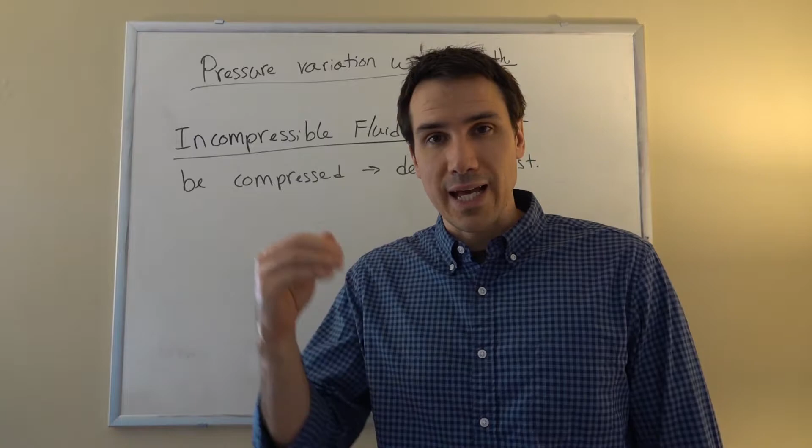Now we're going to talk about the pressure variation of a fluid as you go down into the fluid. So imagine diving into a lake. The deeper and deeper you go into the lake, the higher the pressure is.

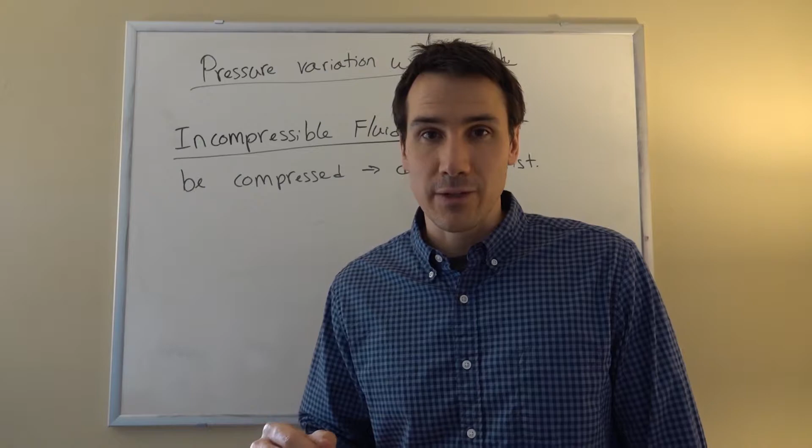And the first thing that we need to think about when we want to do this is we need to limit ourselves to what's called incompressible fluids. This basically allows us to simplify the math. And what an incompressible fluid is, it means that the fluid cannot be compressed. So water is effectively an incompressible fluid.

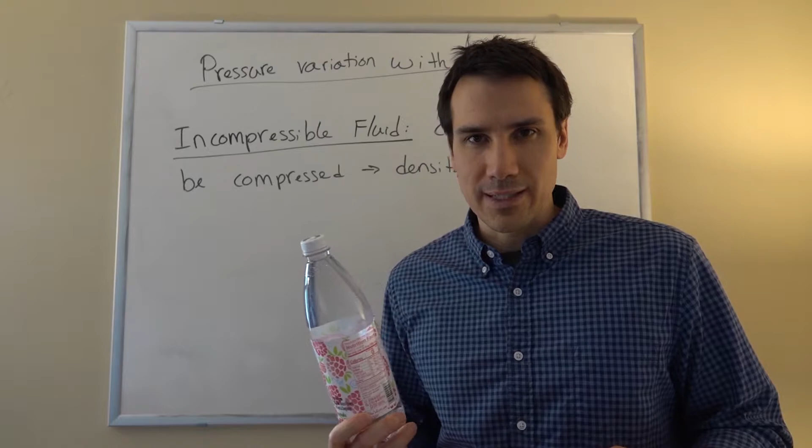Like all things in physics, this is not true 100%. It's not that there is a 0% ability to compress water, but it's very, very difficult to compress water, and it is effectively an incompressible fluid. For any situation that you will find on Earth, water is an incompressible fluid, right?

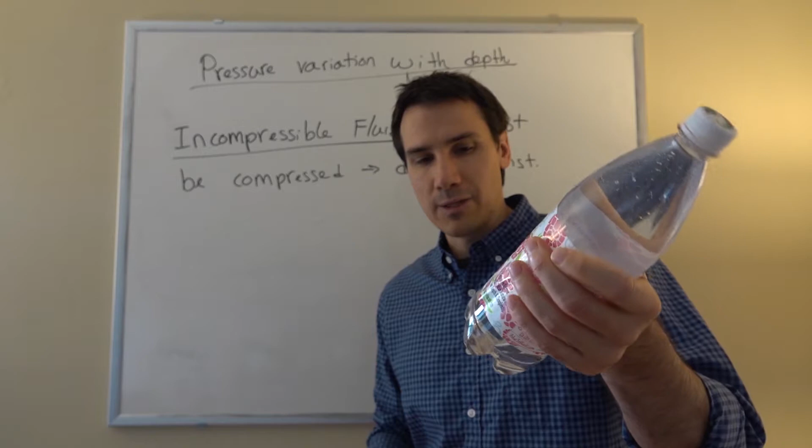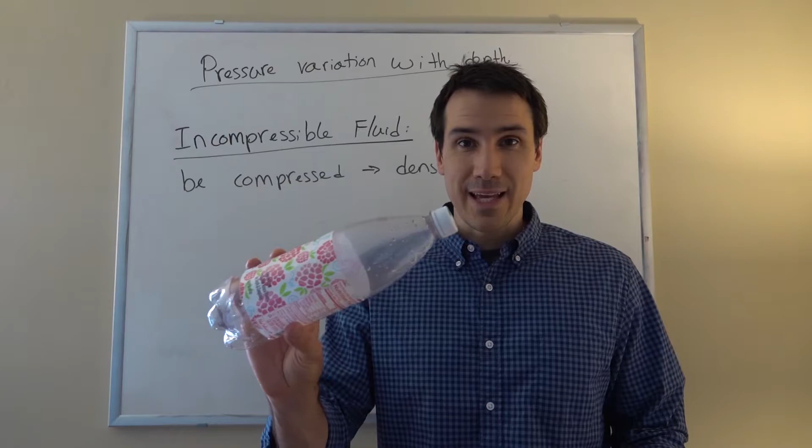So here you can test this just by filling a bottle with water completely to the brim. Notice that there's almost no air. There's a little bit of air trapped in my bottle, but there's almost no air. And if I try to squeeze this bottle, it's very difficult to squeeze. Same experiment with a bottle filled with just air, and I can clearly compress the bottle significantly.

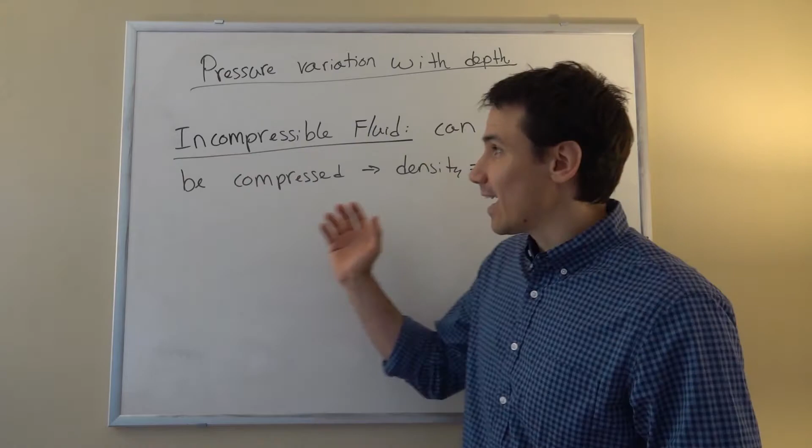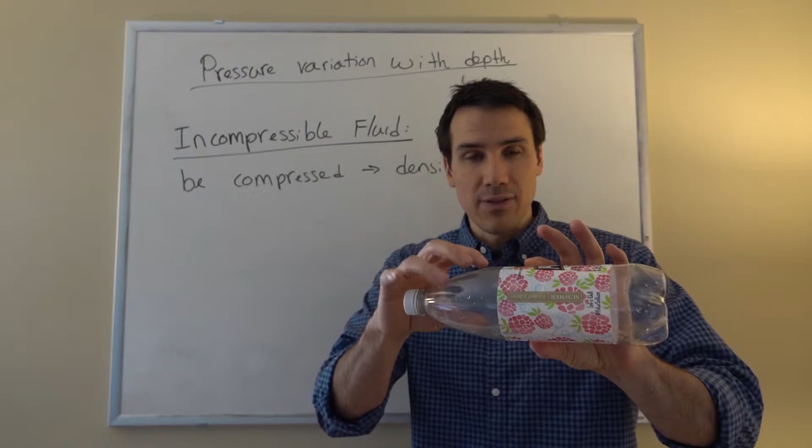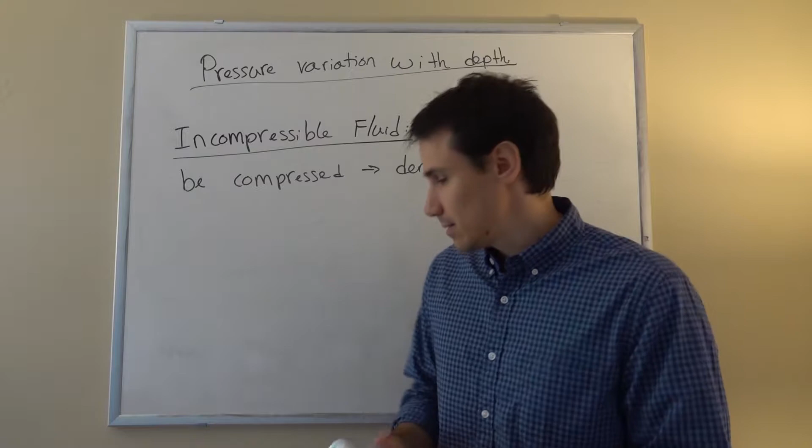So air is not an incompressible fluid. It is clearly compressible, and I can change the density of the air, right? There is some amount of mass of air in this bottle, and by squeezing it, I am able to reduce its volume, which means that its density increases, right? Because I have density equals mass per volume.

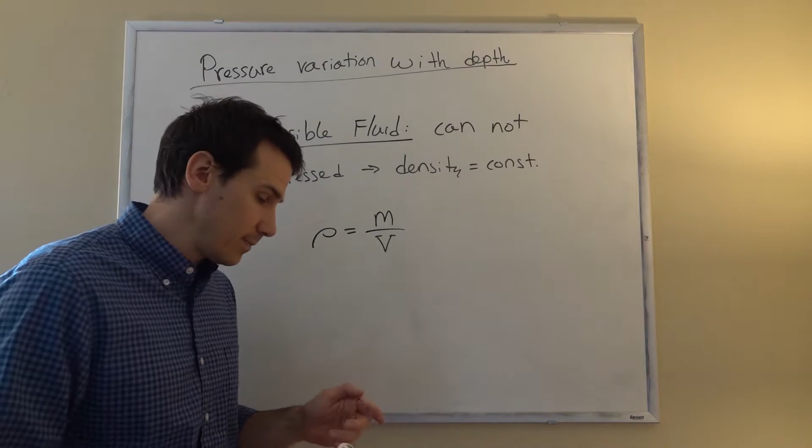So when I squeeze the bottle, I reduce the volume and I increase the density. I also, by the way, increase the pressure. So there is more pressure when I squeeze the bottle than when the bottle is unsqueezed. So if we want to think about how the pressure changes as we move down in some fluid, we can think about the forces on a block of that fluid.

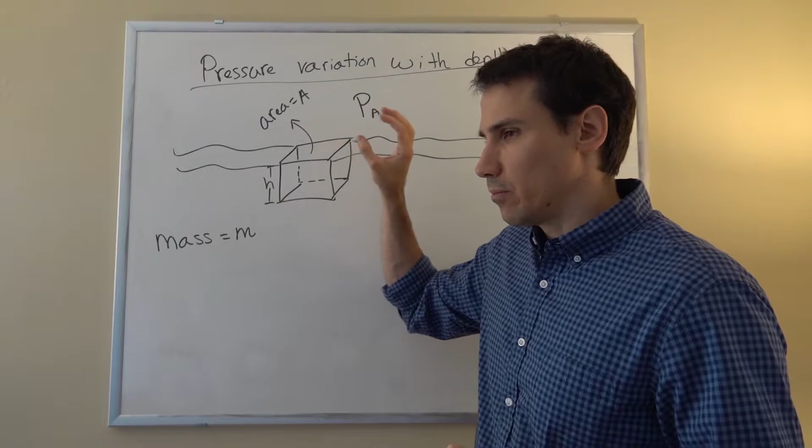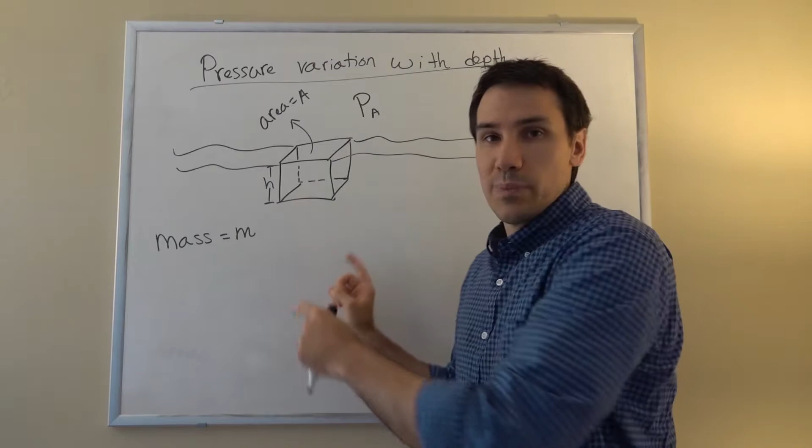So here what I have is just a box of water sitting in a lake. There's no physical box around the water. It is just that I am considering just this bit of the water inside of my imaginary box, right? So you can imagine just taking a still lake and then deciding to only pay attention to one box of the water in the middle of that lake.

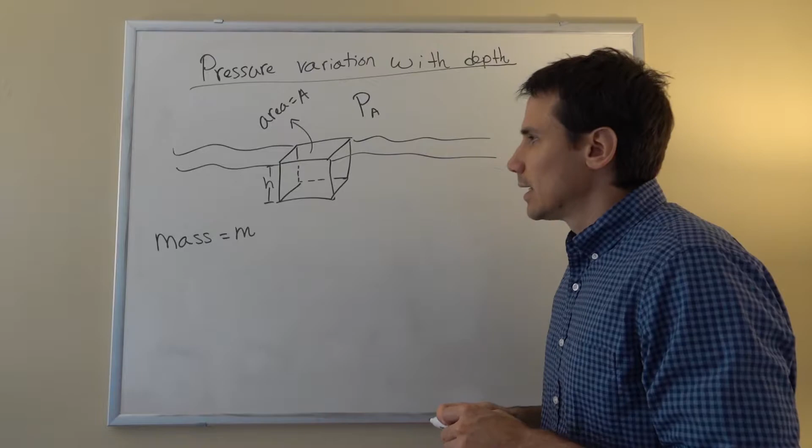I am giving my box of water some mass M. I am giving the top of my box some area A, and I'm giving my box some depth, which I'll call H. Now, if we want to think about the pressures on this box, the best way to do it is to just use our Newton's second law forces equation here.

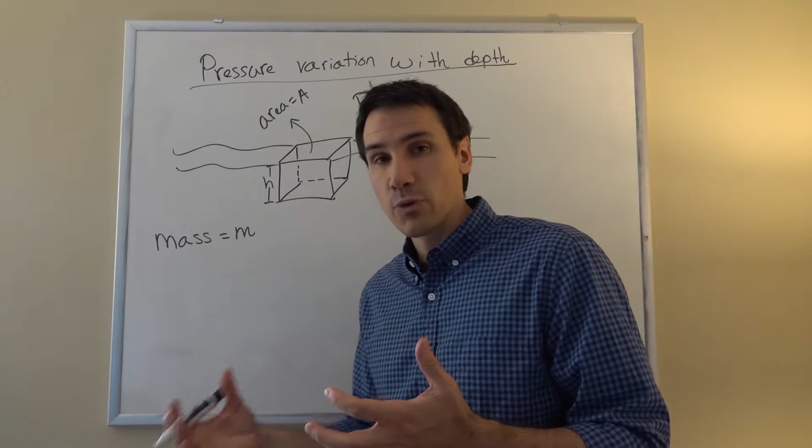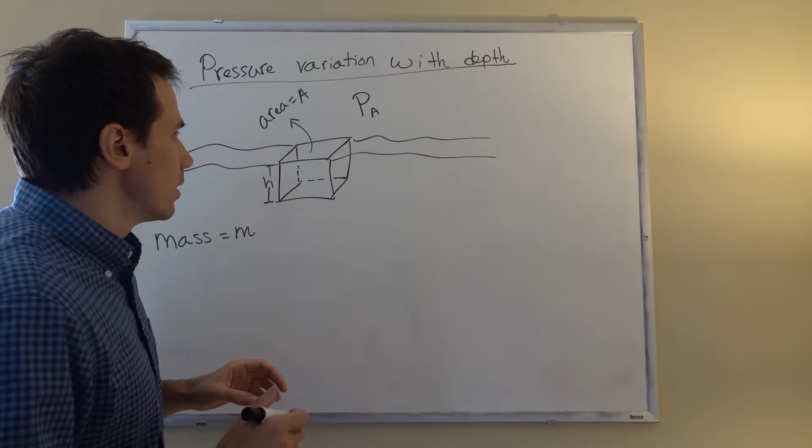So let's think about all of the forces on this box. Well, first, let's just take care of X and Y. The X direction here. So I know that the box is not accelerating back and forth, right? It is just sitting there, which means that the total force in the X direction must be 0. The total force in the X direction must be 0 because I'm not accelerating in X.

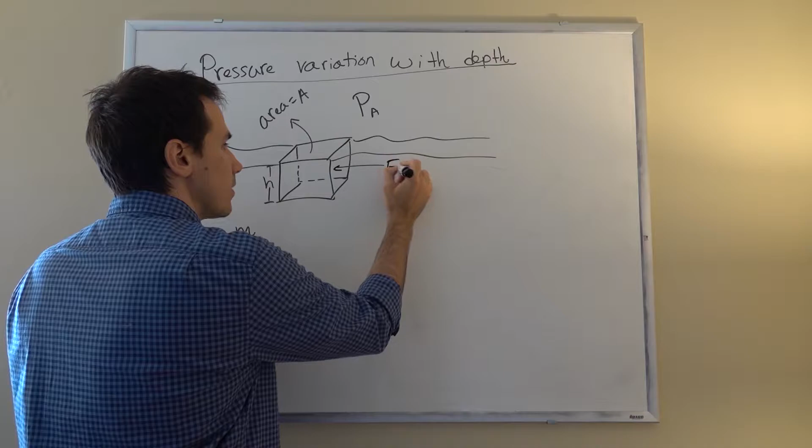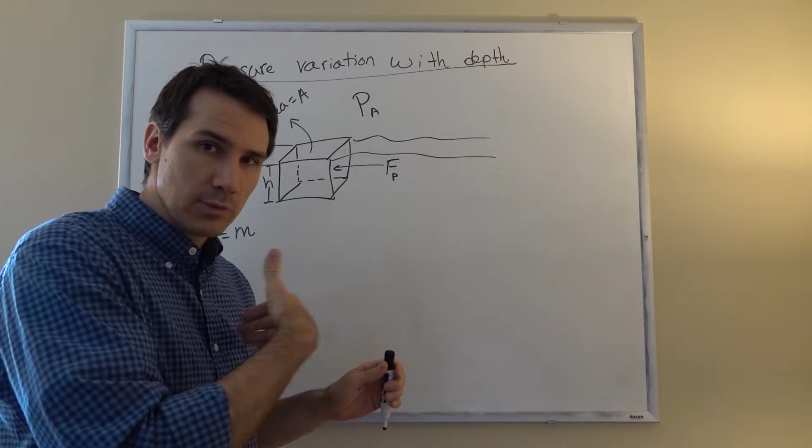The only forces that are on my box in the X direction, so I'll just consider left and right here, is some force of pressure from the right, right? Just like on your body, the pressure force pushes inward on you, right? The air is pushing inward on you. The pressure force on this object pushes inward on it.

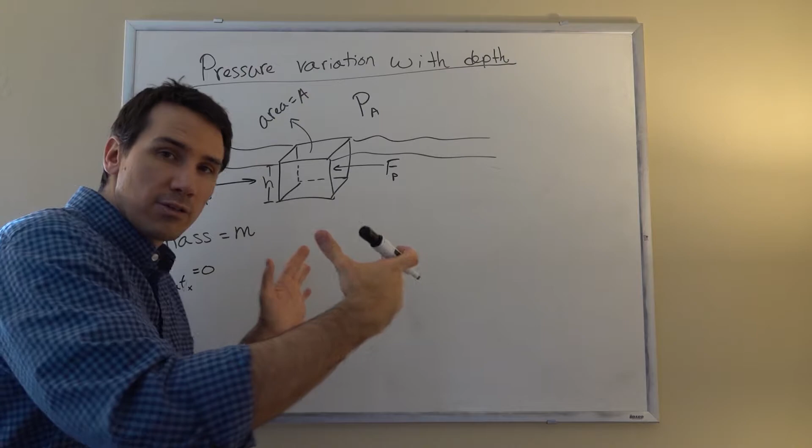We also have another force of pressure pushing the other way toward the right, so our box of fluid is getting squeezed. But because it's not accelerating in X, these two forces must, of course, be equal and opposite. So the pressure on the left side is the same as the pressure on the right side because my object is not moving.

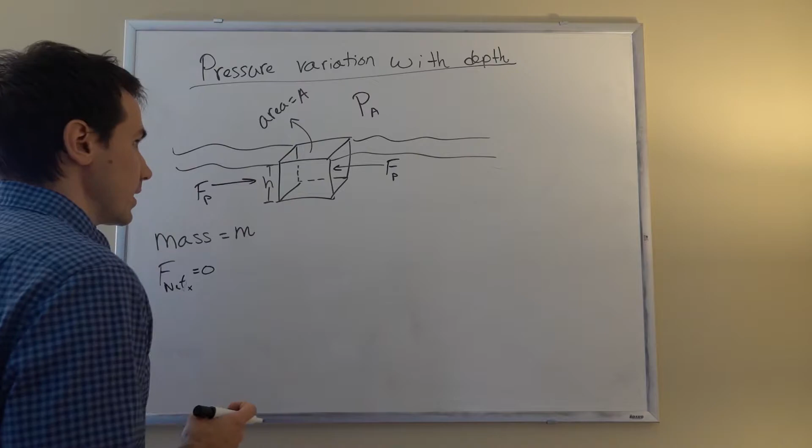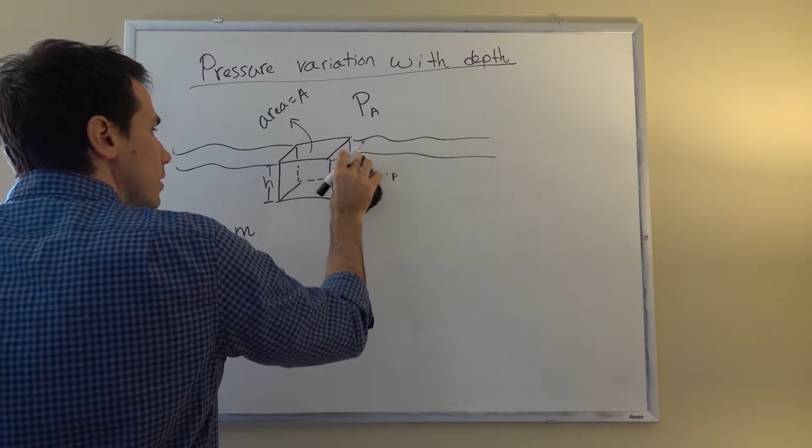Okay, so the next thing that we can consider is the forces in the Y direction, which are more interesting. So I'm going to erase my X forces just to be a little cleaner here. I know that the box is also not moving in the y direction. So my net y force must also be 0, right? Because it's not moving down and it's not moving up, it must have 0 net y forces.

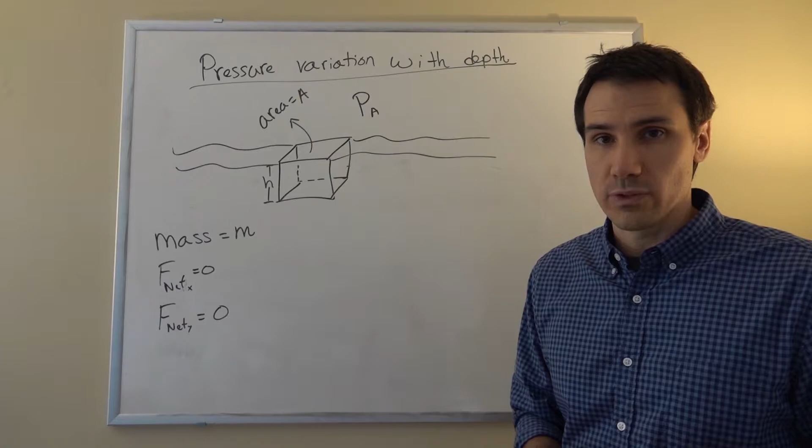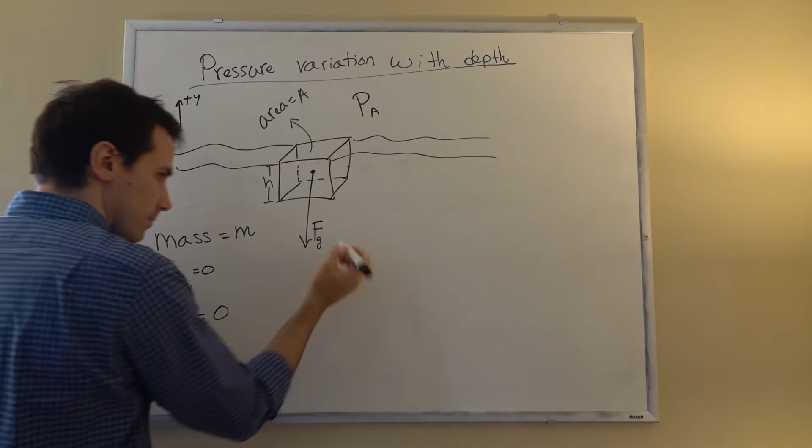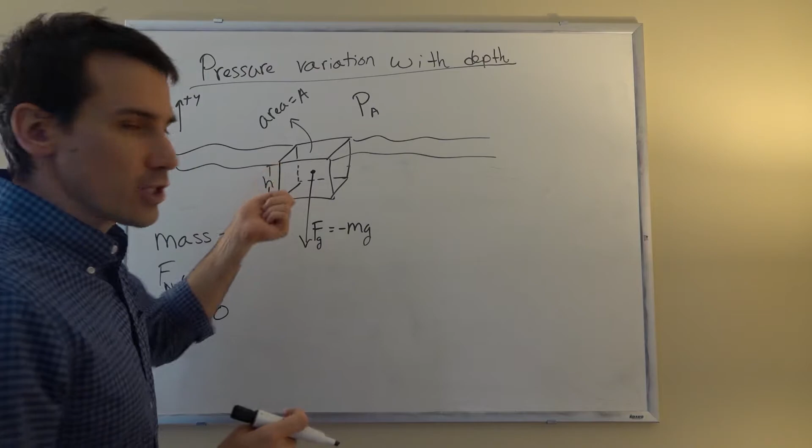So let's see if we can draw all of those forces. Well, first I know that there's gravity on the box, so there must be a force of gravity, and I'll choose up to be positive. A force of gravity equal to negative mg. We draw it as acting on the center of mass, but of course it is each individual water molecule being pulled down. So there is a force of gravity acting on this water as a whole, pulling it down.

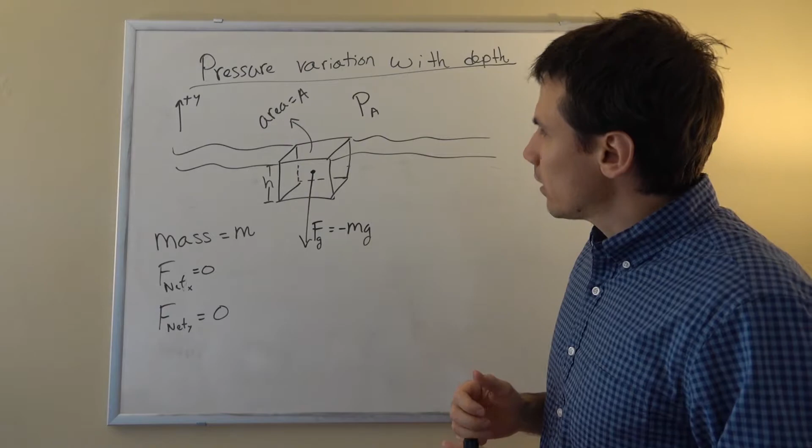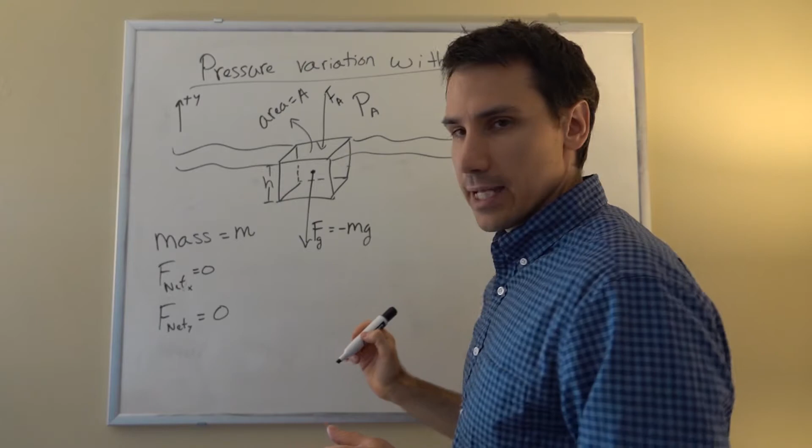We also know that there's a pressure due to the atmosphere, which is also pushing down, right? So the atmospheric pressure must be pushing down on the water. So I can draw that force. I'll write it as F sub A. And the force of the atmosphere must be equal to the atmospheric pressure multiplied by the area, right?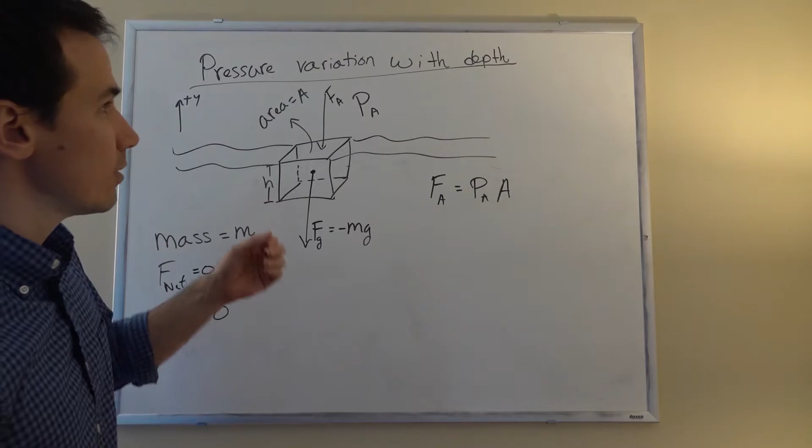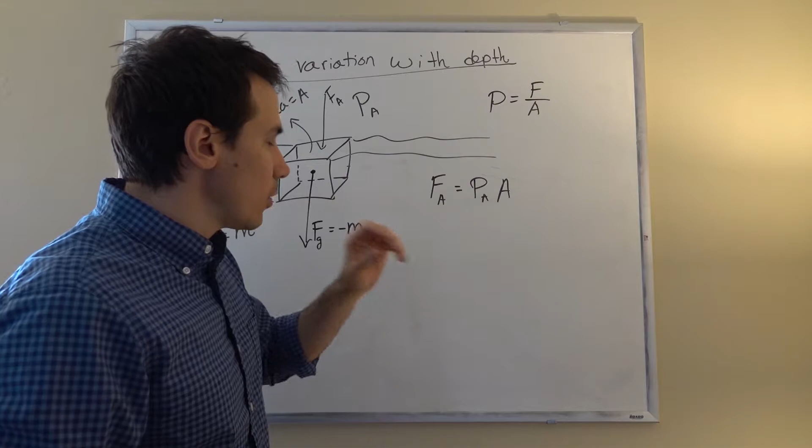Because I know that pressure is equal to the force per area. So the force must be the pressure multiplied by the area. So this is my force due to atmospheric pressure. Note that as my area increases, the total force increases, right? So if I thought about the force on the entire lake, there's a lot more force pushing down on the whole lake than on 1 square meter of it.

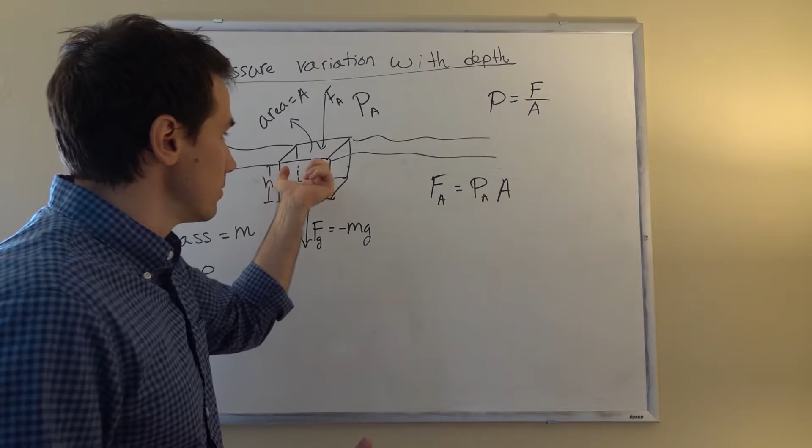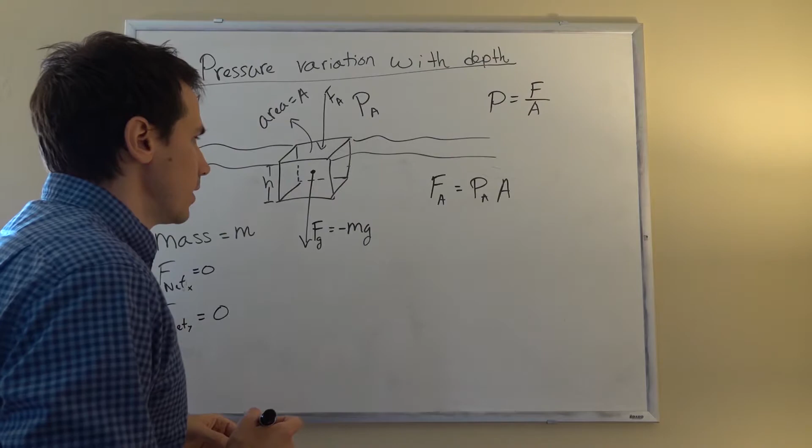Okay. And now I have 2 forces pushing down on my box. I have a force of gravity pushing down, and I have the pressure due to the atmosphere pushing down, giving me a force due to the atmosphere. Okay. 2 forces pushing down. If these were the only forces on my box, the box would clearly accelerate downward, right? Because there is a total force downward on the box.

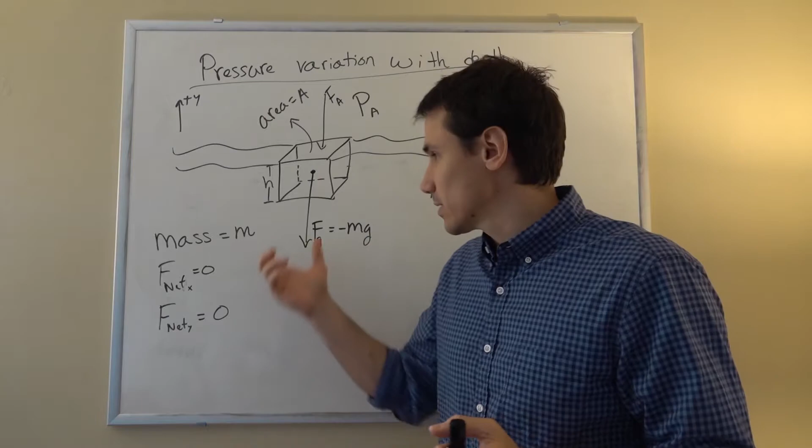So there must be a counteracting upward force on the box, and that is the force of the water pressure from below. So I'll call this F sub P. It's going to point upward and support the water from below, right? So it's stopping the water from simply sinking, because I know the water is stationary. So I have my 3 forces, the force due to the pressure below, the force of gravity, and this atmospheric pressure force. I'm going to put a minus sign on this since that is a downward force as well.

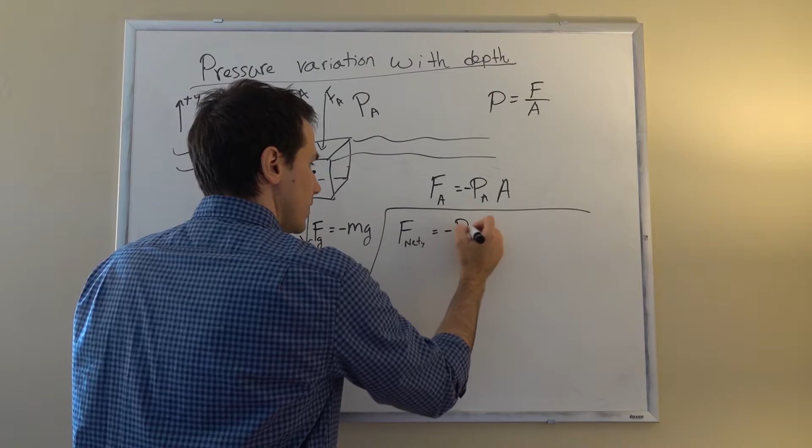And now what I can do is I can write, so I will box this off, my net y force equation as the negative PA, my force due to the atmospheric pressure, minus mg, the force due to gravity, plus the force due to the pressure at the bottom of the box. And I know that these things must add to 0.

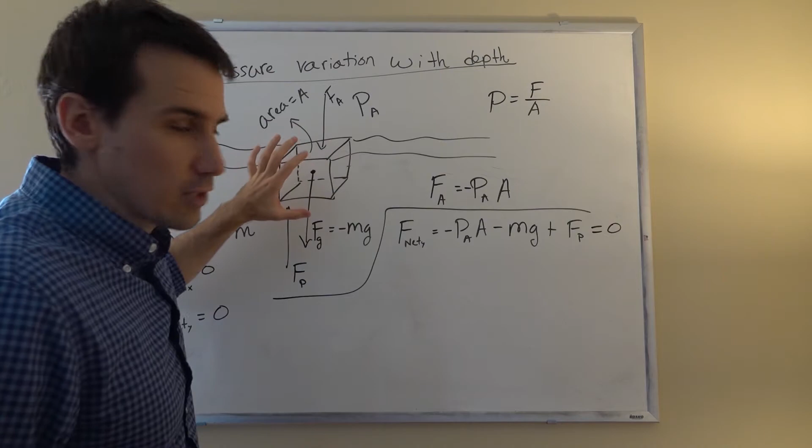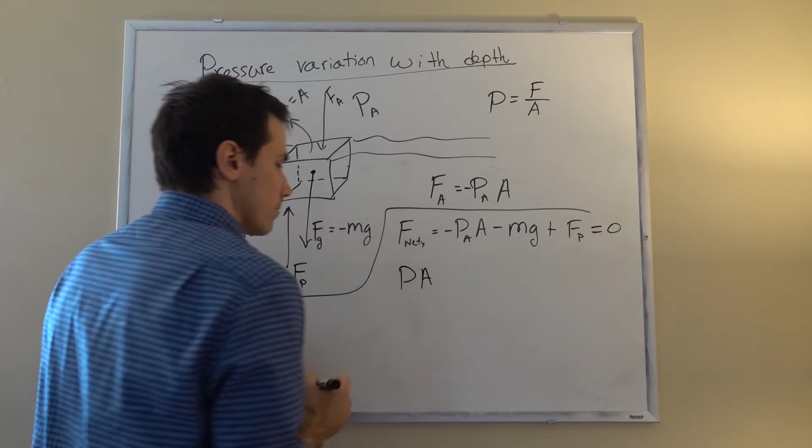Okay. And I can rewrite this force of pressure as simply the pressure at this point, which I'll call P, multiplied by the area of the box. And because I made my box symmetric here, I can just say that the area at the bottom of the box is the same as the area at the top of the box, which is just A. So I can write that P times A, my force due to the pressure, equals the atmospheric pressure times A plus mg.

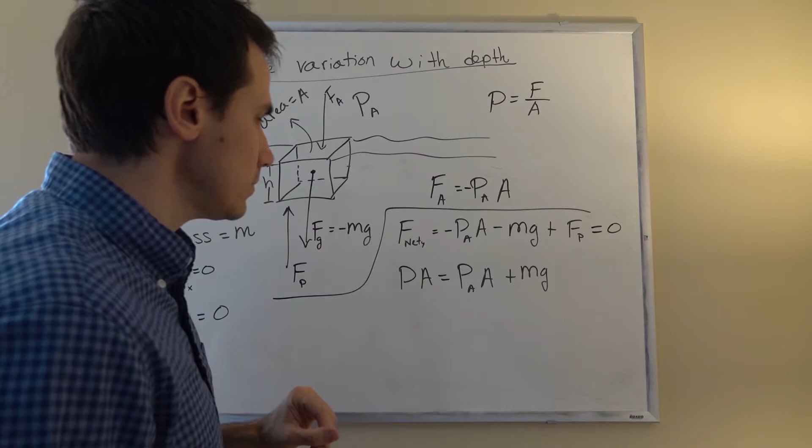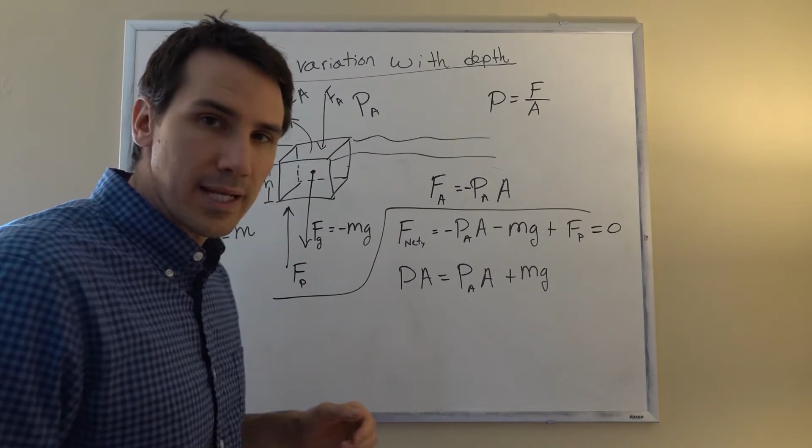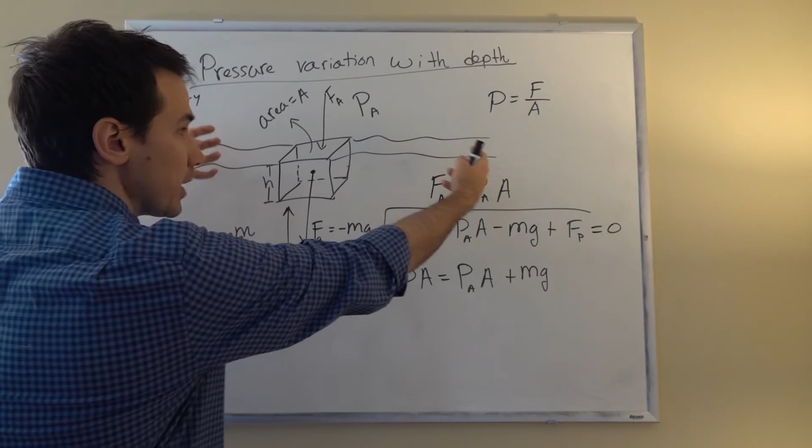Okay, so assuming I know atmospheric pressure and I know the mass, and I've picked the area of my box, I could solve for the pressure at this depth. But I can actually be a little more clever about this if I realize that the mass of my box of water here actually just depends on the area that I chose, right? If I made a bigger box, my mass would increase. If I made a smaller box, my mass would decrease, right?

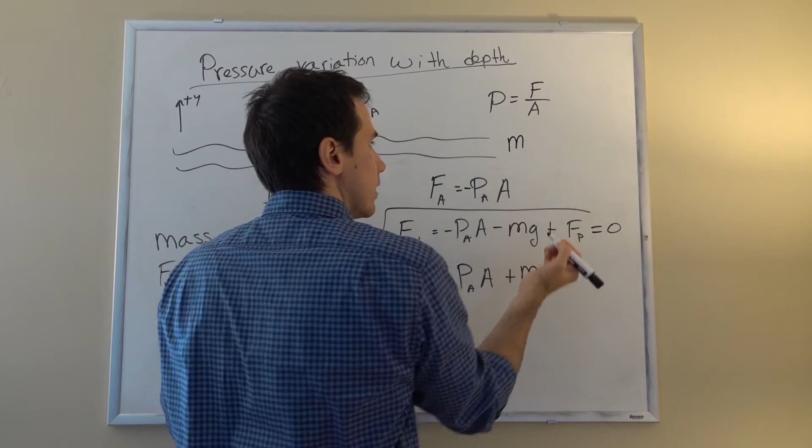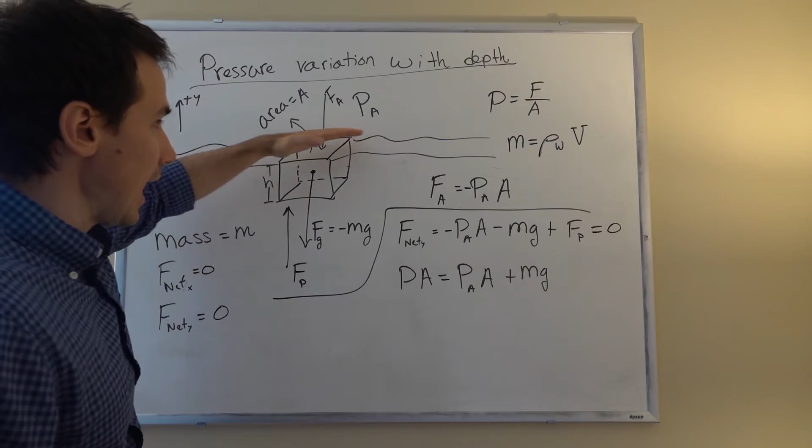So I can actually write down my mass of my water as the density of water multiplied by the volume of water that I chose, right? This is just my density equals mass over volume, which I've solved for mass. And I can rewrite my volume of the cube as the area of the top multiplied by the height. So I can really rewrite my mass as the density multiplied by the area multiplied by the height.

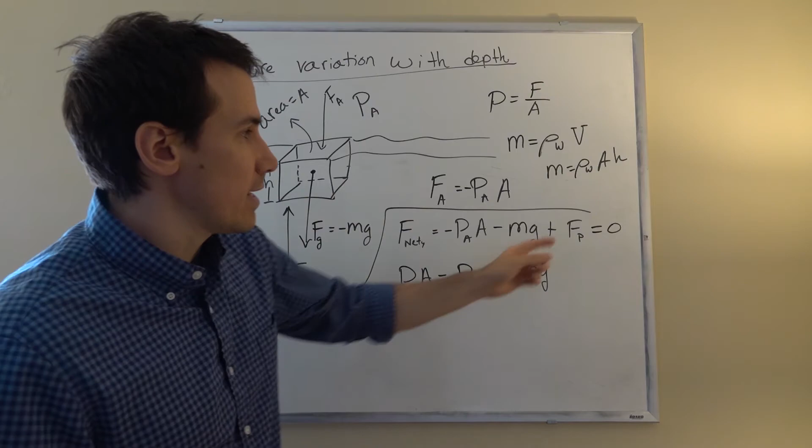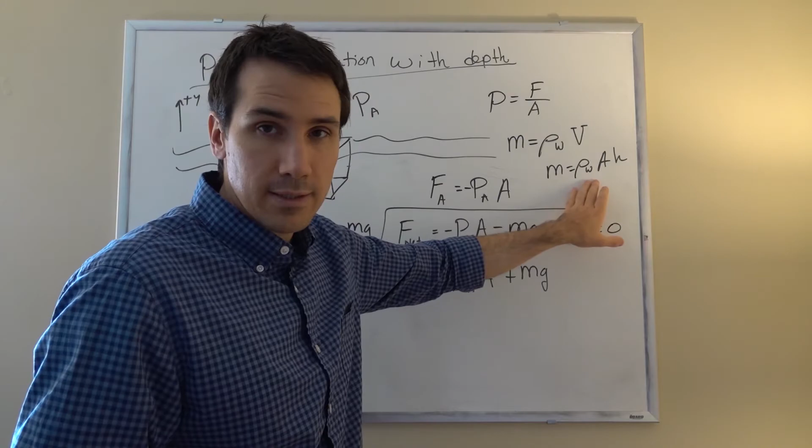And this nicely takes into account that if I pick a larger area or if I pick a larger depth, the mass of my water increases, right? The density of my water is constant, but if I choose a larger volume, I get more mass in that volume. Okay, so now I can write that the pressure multiplied by the area, my force due to the water pressure from below, looks like the atmospheric pressure times the area plus the density of the water multiplied by g multiplied by the volume, which I'm going to write as the area times the height.

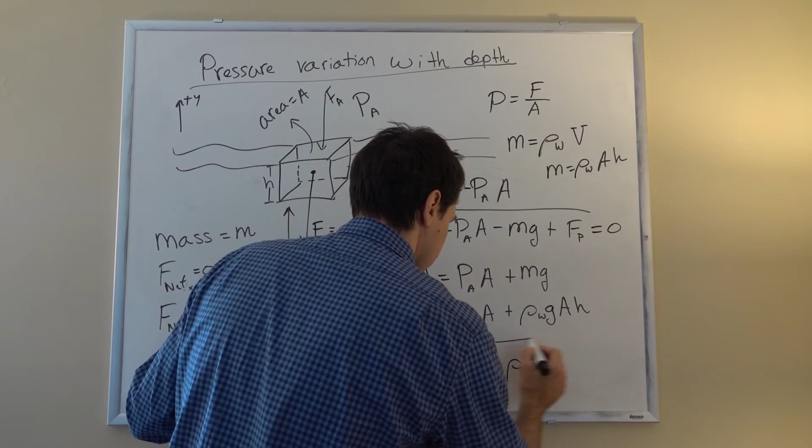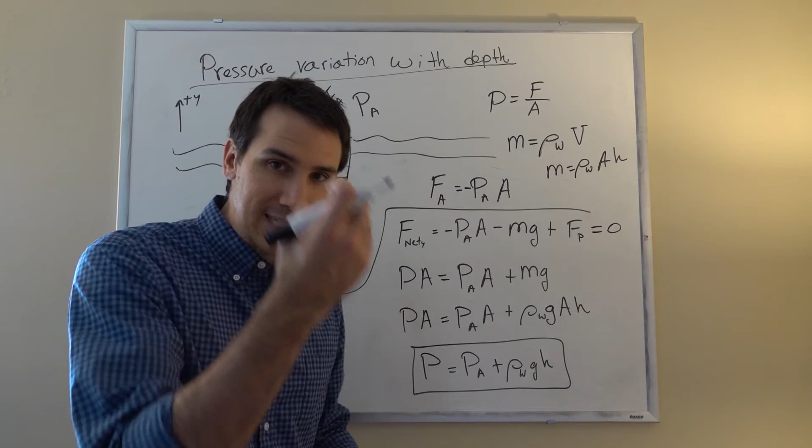Now notice that there's an area in each of my terms, so I can take that out, and I get that my pressure looks like the atmospheric pressure plus the density of water multiplied by gravity multiplied by the height. And in this case, H stands for depth, not necessarily height. Okay, so the pressure at some depth here is equal to the atmospheric pressure plus the density of water multiplied by gravity multiplied by the depth at which I have gone.

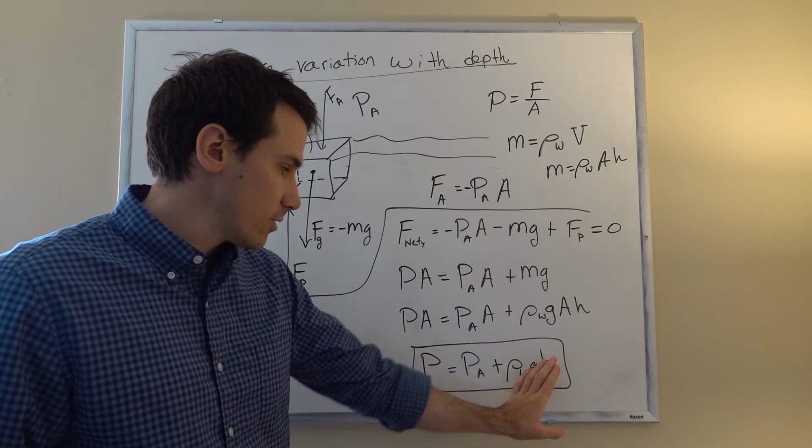All right, let's just take a second to make sure that this equation makes sense. One logical double check would be if height equals 0, that is I'm at the top of the water, then my pressure should just be atmospheric pressure. And indeed that's true, right? If I set H equal to 0, then the second term goes away and my pressure is atmospheric pressure. So at the top of the water, my pressure is atmospheric pressure as expected.

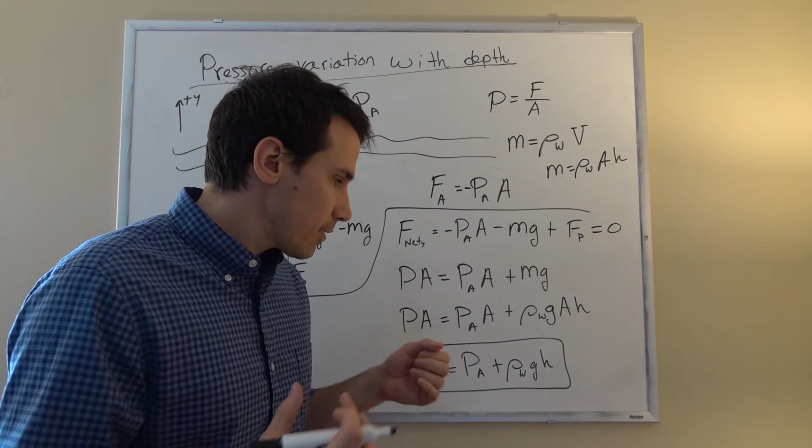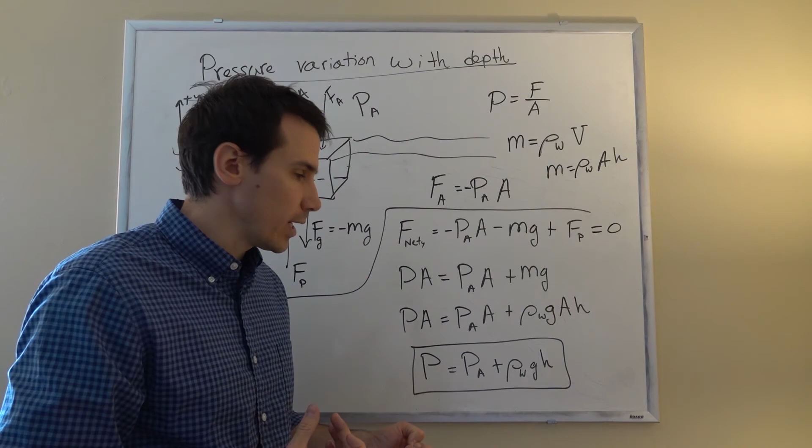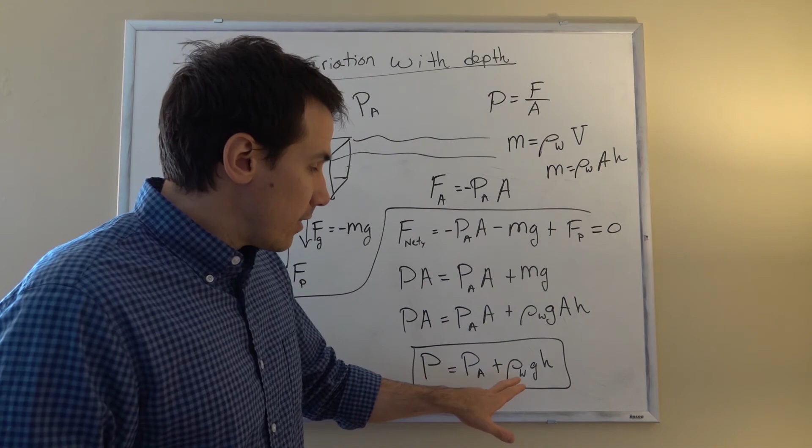As I go deeper and deeper, I get more and more pressure in a linear fashion because there's more and more weight of water above me pushing down, right? So for every bit that I descend, I get some amount of water above me pushing down, increasing the pressure, right? The density of water: if water was more dense, then the pressure would increase faster because the weight of the water above me would be greater.

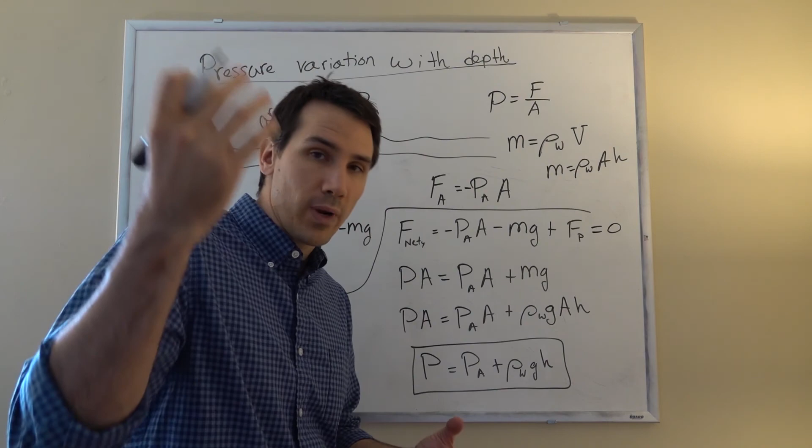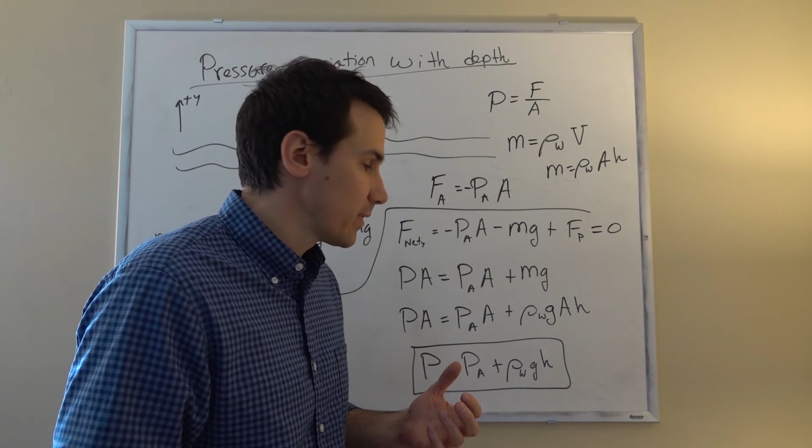Likewise, if I was on a different planet with a larger g or a smaller g, then my pressure would increase more or less, depending on how much gravity is pulling down. Again, it's about the weight of the water above you that is pushing down on you here. Okay, so this is our equation for pressure as a function of depth within some fluid.